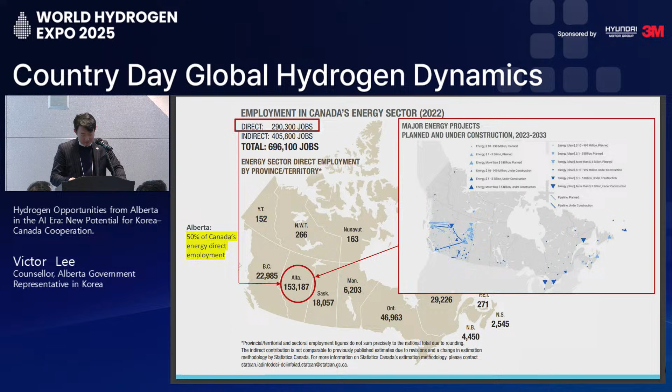And Nicholas also shared this slide, I added a little bit. I think you mentioned 130 projects. Out of 130 projects, 80 projects are under construction or announced and actually putting more money into it, so more active. And if you see Western Canada, a lot of projects are in Alberta. Korea's E1 and SK Eco Engineering and KOSPO are very active in Alberta. SK also has projects in Eastern Canada, but that's for exporting to Europe. The majority of the projects in Western Canada are blue hydrogen in Alberta, some green hydrogen in BC. But as you can see, Alberta has major projects in hydrogen.

And Alberta expects to increase our hydrogen production to over, I think, 4 to 5 million tons based on the current situation, but mainly coming from blue and gray because we have really amazing natural gas resources. And those are very competitively priced. And CCS technologies are improving, so we are able to capture almost 98, 99% of CO2, and technology is getting better and better.

So CCUS. Alberta has one of the world's most advanced CCUS ecosystems. Shell's Quest project has been capturing a million tons of CO2 per year for the past 10 years. They are just celebrating the 10th anniversary this year. So that means 10 million tons of CO2 have been successfully stored. I guess Shell's is one of the largest global projects. And this experience and ecosystem gives Alberta a strong competitiveness in developing low carbon hydrogen and ammonia at commercial scale.

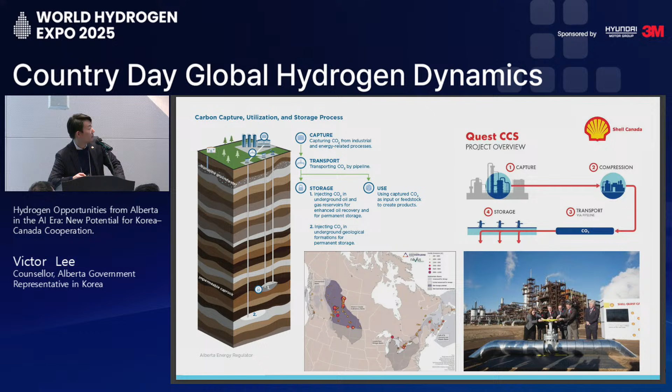So as you can see, most of the CCS availability is in Alberta and a little bit in Saskatchewan. And compared to other provinces or other US states, this is our key strength. And that's why Canada's largest hydrogen convention and Canada's largest CCUS convention are being hosted in Alberta, in Edmonton. Our next Canadian Hydrogen Convention will be April 2026, and I'll be personally attending together with federal colleagues. If you have any interest in deepening your insights into the Canadian hydrogen sector, please consider this conference. This is the best place to connect with Canada's hydrogen stakeholders.

Of course, there are some challenges too. We can talk about R&D opportunities, investment opportunities, but what about trade? Alberta wants to export our blue hydrogen to Korea because we have a competitive advantage in shipping. This is from AltaGas, so the data is a little bit different for natural gas as well as for oil, but it's very similar. Compared to the US Gulf Coast or Middle East, we didn't include Australia because it's very similar to Alberta or Canada, so it's our direct competition. But about the same, 10 to 11 days. So we have a logistical advantage.

However, our disadvantage is domestic logistics. All our Canadian commercial hydrogen is produced in Edmonton. And then from Edmonton to Prince Rupert, there's about 1,500 kilometers of rail. So you have to put hydrogen into ammonia rail tankers, ship it to Prince Rupert, and export it. Currently, there is a federal government unlimited liability clause. So there's a task force between federal government, provincial government, and industry to navigate this logistics and insurance cost. And once it can be resolved, we'll be the global superpower of exporting hydrogen to Asia.

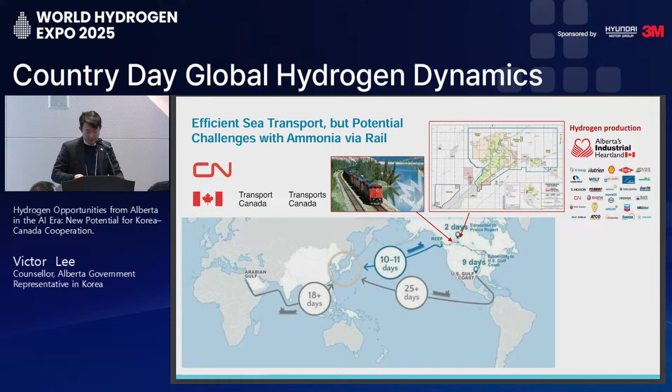In summary, I think there are some 5 key areas of collaboration. You can produce hydrogen in Alberta and export. It's a little bit of a mid to long-term opportunity, but it's still there. The second is hydrogen for data centers, so hydrogen for AI usage in Alberta. Third and fourth is more focused on R&D collaboration.

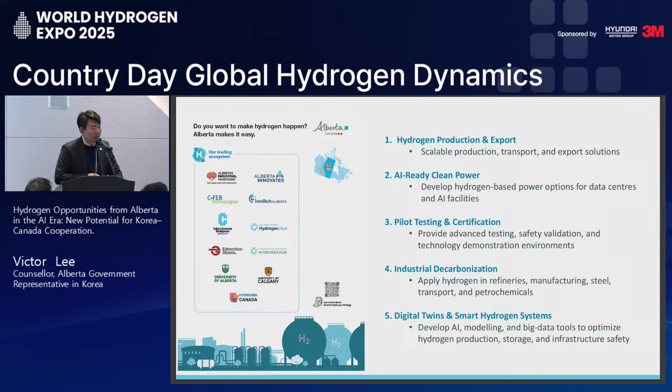If Korean companies or government agencies or R&D institutions want to conduct focused R&D, then we have matching institutions and academia. Last is AI for hydrogen. We can talk about hydrogen for the AI industry, but we can also talk about developing AI to advance the hydrogen economy. So those are also some opportunities. And this is forward-looking potential opportunities only, and publicly available info.

Based on the timeline of energy transition and the economic impact, that's what we see from our office. There are existing opportunities between Canada, Korea, and Alberta. We've been traditionally exporting metallurgical coal, thermal coal, oil, natural gas, pipeline safety, critical minerals. But going forward, some low-hanging fruits or immediate opportunities include joint feasibility studies between Alberta and Korean stakeholders to further advance various opportunities. There's R&D partnerships, energy safety, circular economy, or hydrogen-related standards and codes.

Going forward, joint CCS projects or pilot projects for Korean companies to test, pilot, commercialize and develop projects together and go overseas. And even further, you can produce hydrogen from Alberta, use it for industry for blue steel or data centers, or even looking forward, SMRs, small modular reactors as well.

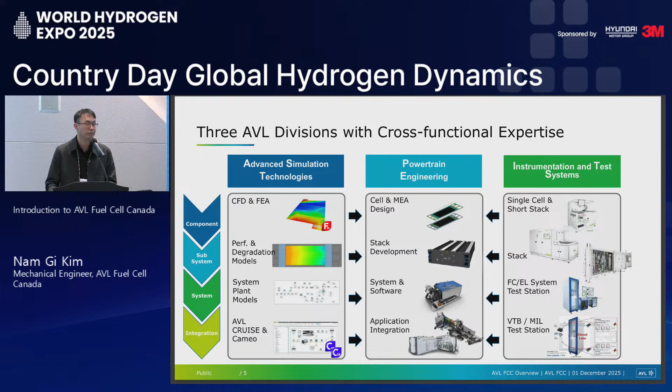So focusing back on AVL Fuel Cell Canada, we are a relatively new affiliate, but we have a number of employees who've had extensive years of experience working with PEM fuel cells, as Vancouver is home to a number of world-class companies. Leveraging this experience, we're able to design, engineer, prototype, and test custom fuel cell and electrolyzer stacks.

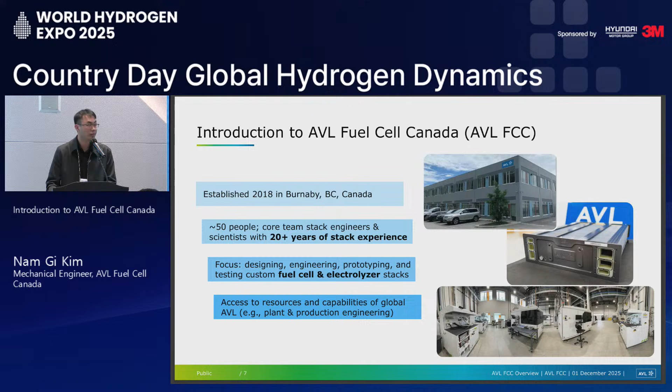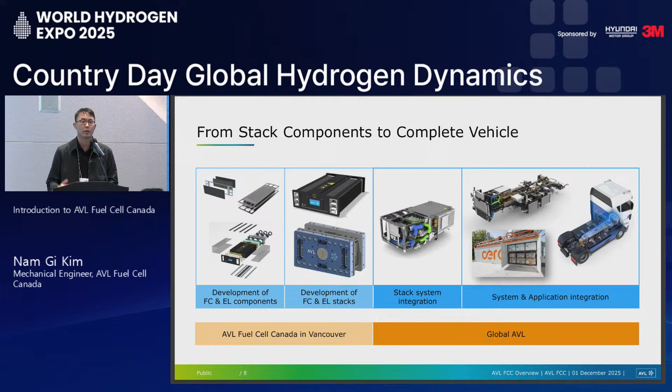Just to give you a little bit of background, AVL Fuel Cell Canada primarily focuses on the component and stack level. However, we do work with AVL Global to help meet customers' needs in stack system integration and system and application integration as well. And in the past, we have successfully completed projects working in this collaborative manner.

Of the specific areas where AVL Fuel Cell Canada has a lot of knowledge, there are 3 that I would like to highlight. First is design of bipolar plates. We have employees with experience working with carbon and metal bipolar plates. Another area of expertise is design of the membrane electrode assembly, and this includes electrodes, membrane, CCM, GDL, and for electrolyzers, PTL as well. Finally, we have experience in design of stack hardware, which includes end plates and compression systems.

And combining all these 3 areas of expertise, we're able to provide a comprehensive design of fuel cell or electrolyzer stacks. And we're also able to provide a range of stack-related services to help in our design.

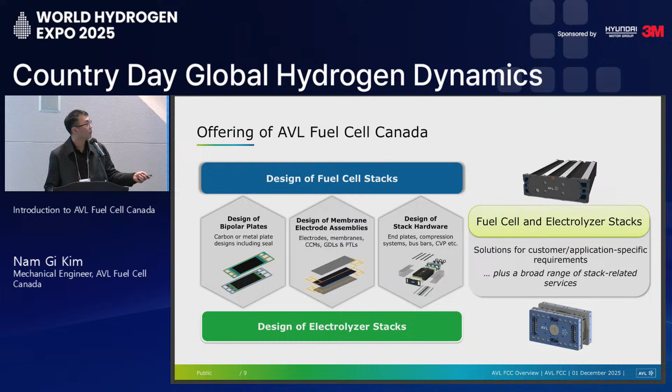In our state-of-the-art R&D infrastructure in Burnaby, we have 2 areas I'd like to highlight. First is our prototyping lab. While we do not have the capability to mass produce stacks, we have the capability to produce small quantities where we can show our prototypes, and we can use these stacks for design verification tests such as performance and long-term

durability. We also have a hydrogen-safe lab where we have a number of testing platforms. We have 4 subscale stations which are focusing on component benchmarking and screening, and we have 4 short stack and 1 full stack test bed to focus on design verification tests.

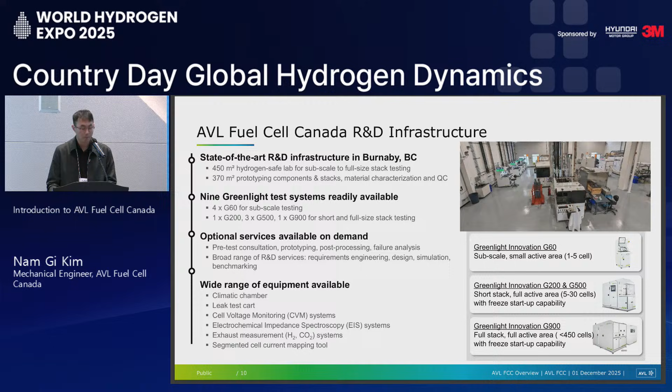To give you a little bit of some of the projects that we've had, leveraging the innovations that we have with the bipolar plates, MEAs, and stack hardware, we have come up with a number of stack designs, which we then use as a base for customer projects. One thing I would like to highlight here is that we have experience working in a wide range of industries. In the past, we have worked with a commercial vehicle OEM, marine OEM, air-cooled stack for drones, as well as multi-megawatt PEM electrolyzer stack as well.

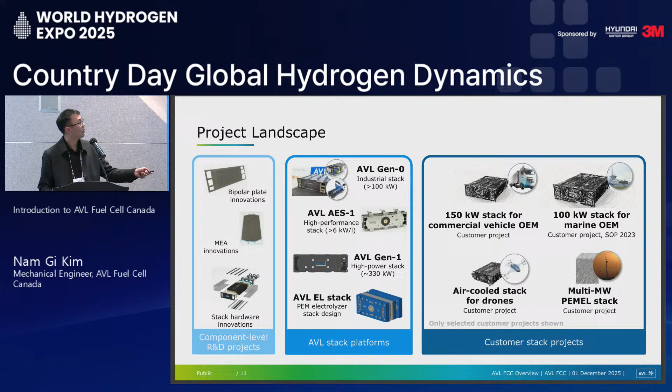To go into a little bit more detail, this is a picture of our Gen 1 PEM fuel cell stack. It has a rated power of 200 kilowatts with a peak power rating of 330 kilowatts. Using carbon plates, it has high efficiency, and with our in-house testing, we've been able to showcase that it has freeze startup capabilities from minus 30 degrees, and it has extensive lifetime durability as well.

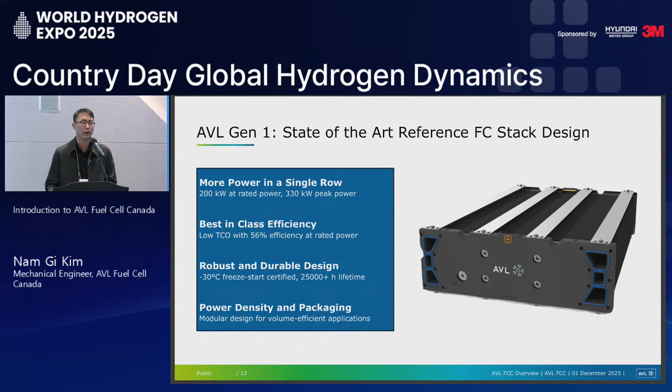Now I would like to discuss with you some of the innovations that we're looking into at AVL Fuel Cell Canada. One area I would like to highlight for PEM stack is intermediate temperature and high temperature. What we've found is that there are certain sectors such as aerospace and heavy industry where they're looking to operate PEM stacks at a higher temperature.

Currently we're looking into innovations using different technologies to push the PEM stack, which traditionally operates up to 90 degrees Celsius at stack outlet temperature. We're trying to push this to at least 120 degrees, which we call intermediate, and even all the way up above 200 degrees for high temperature application. In conjunction with coming up with innovations in terms of material selection, we're also upgrading our lab capability to support our design choices.

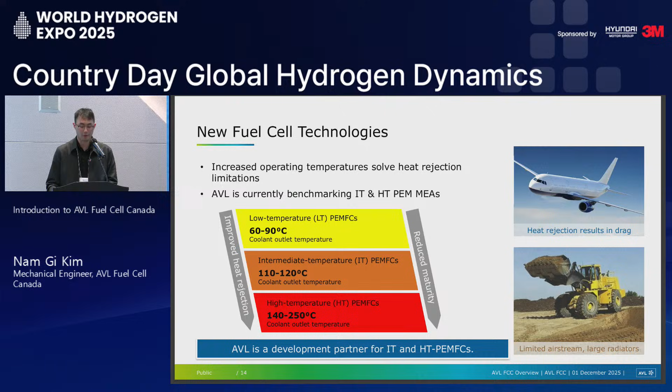Another area of innovation that we're looking into right now with PEM stack is lightweighting our stack designs. Here we are working with Red Bull and taking our Gen 1 stack, which I've shown you before, and identifying ways to reduce weight and thus increase the power density. We're doing this in 2 steps.

We have already completed the first step, which focuses on the outer stack compression, stack hardware side, which has given us about 30 kilogram reduction in weight. And right now we're further looking into additional areas where we can further decrease weight and increase our power density.

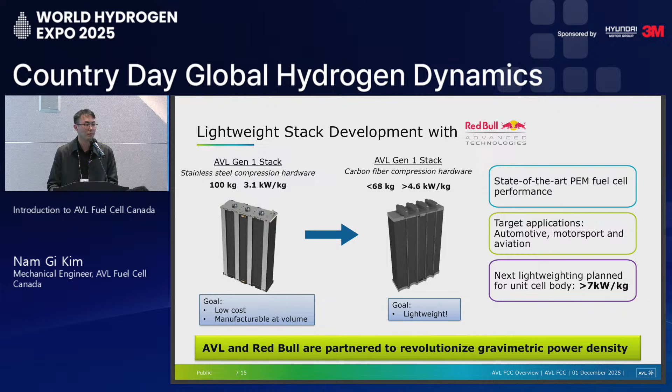The next area I would like to showcase to you is PEM electrolyzer. With the wealth of knowledge that we have in the company, we found out that there is great synergy between PEM fuel cell stacks and PEM electrolyzer. Last year, we decided to take on this project. Within the course of the year, we were able to design, develop, build a prototype and test an electrolyzer stack, which meets the US Department of Energy targets.

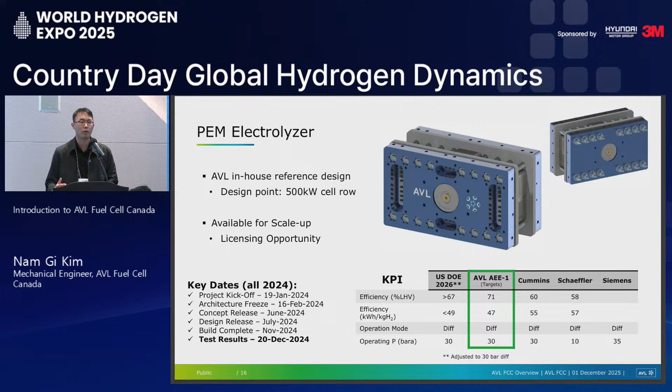A model of the stack is available for you to view downstairs at the Canadian Pavilion if you want to see. This is a project that we feel very accomplished in the company for making this stack. Right now, we're looking into further improvements. We know that the market is looking for multi-megawatt solutions for PEM electrolyzer, and so we're looking into different areas on how to improve upon our initial design.

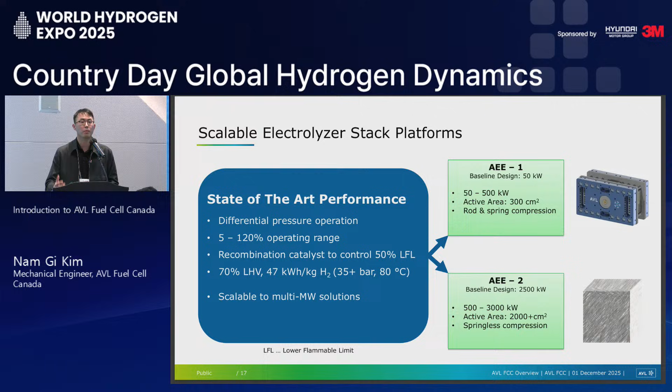The last area I would like to discuss with you is the AEM electrolyzer. This is a technology that is not as mature as PEM stacks and PEM electrolyzers, but AVL feels like this is an area where we could potentially see a lot of growth in hydrogen generation. There are 3 areas with AEM which we focus on.

First, there's the supply chain definition. Here we're looking for companies that we would work together with to provide us with next generation MEAs and CCMs. In the past, for PEM stacks and electrolyzers, we have had a very good relationship with our suppliers, where we would get the product, provide valuable feedback and help develop the products. This kind of relationship is something we're looking for in the AEM electrolyzer world as well.

The second area of AEM is stack development. Here we're looking for any companies that need stack design in their application, where we'll be able to provide our expertise and help come up with a stack design. The last area of AEM is testing services. Here we're looking for anybody who has AEM technologies that they want help to test and validate. We'll be able to perform testing at both component level and stack level to show performance and/or durability.

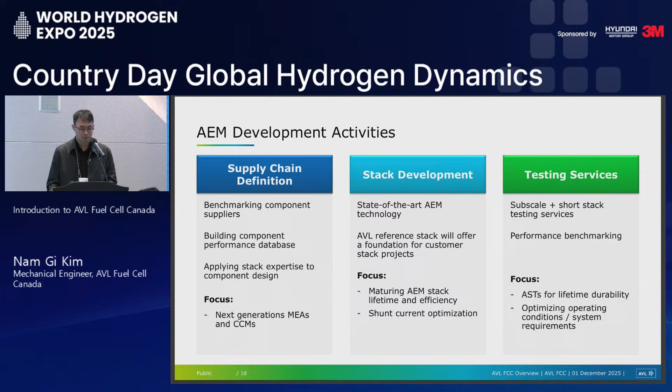Jumping back to stack development, we do have an R&D stack in development for AEM. We started earlier this year, and we're currently in the prototyping phase, and hopefully we'll be able to get some test results early in Q1 of next year. We're hoping this will be a stack design that we'll be able to base off of for any customer who is looking for a stack design of their own.

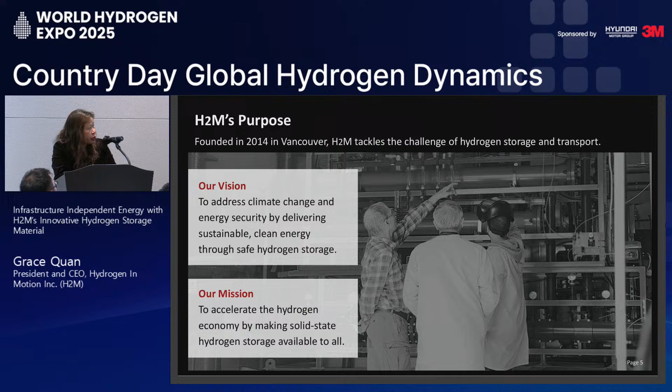My apologies. Okay, so a little bit about Hydrogen in Motion. I'm the co-founder and CEO with my colleague Mark Cannon, who's the CTO and is here at the show. We founded Hydrogen in Motion to address one of the major problems in the hydrogen economy, which is hydrogen storage. Our vision was to address climate change by bringing clean energy to fruition through the vehicle of solid-state hydrogen storage.

So what's holding hydrogen back? I call hydrogen storage and transport the silent killers of hydrogen projects for 3 reasons. One is it's very capital intensive. Many project developers don't budget enough for hydrogen storage. It's about the same price as your electrolyzer or your fuel cell, so people are usually an order of magnitude short for the storage. The high pressure is complex and expensive. And then there's no hydrogen infrastructure. So storage and transport are a challenge.

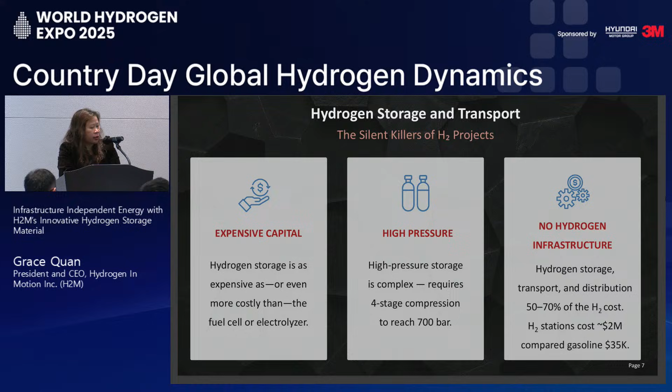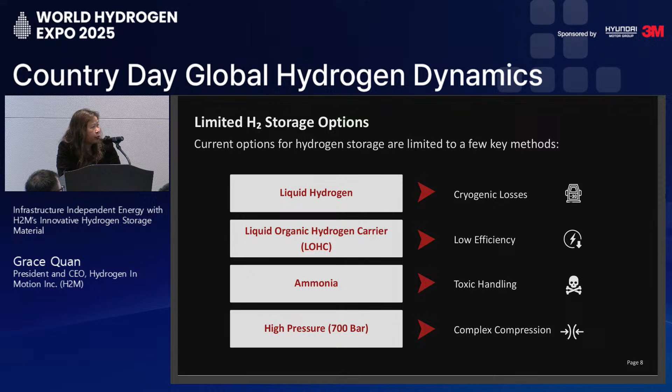There are a number of different hydrogen storage options. Liquid hydrogen has the challenge of cryogenic losses, boil-off. Liquid organic carriers have low efficiency; it takes about as much power to get the hydrogen in and out as the power that you're carrying. Ammonia has very well-known toxicity issues, and high pressure has the complexity of high pressure.

So what's our solution? Finally, we get to this. Hydrogen in Motion has developed a solid-state hydrogen material. It's carbon-based, designed at the quantum level, doped and decorated with nanomaterials specifically to attract hydrogen. We add a small amount of pressure, 50 to 80 bar, and we're able to get equivalent storage to 700 bar, but in a smaller tank.

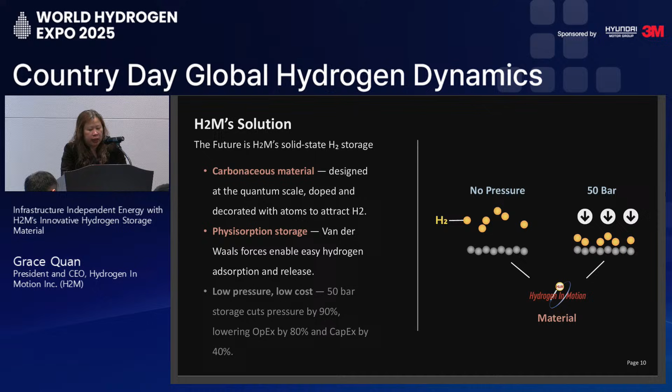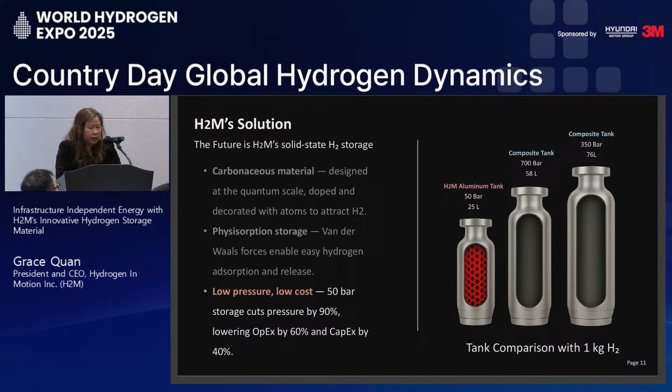Our value proposition is in 4 dimensions: safety, affordability, gravimetric and volumetric density. We have considerable advantages against batteries and other storage technologies.

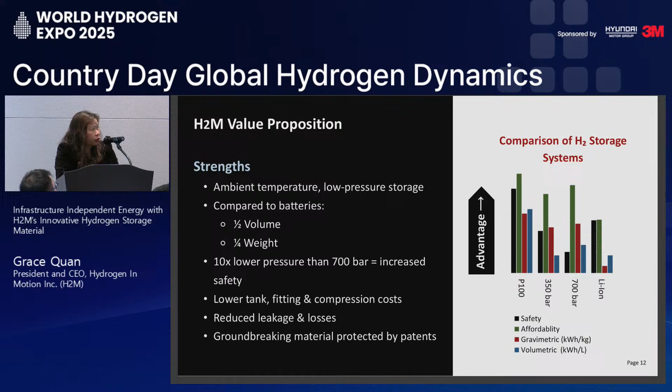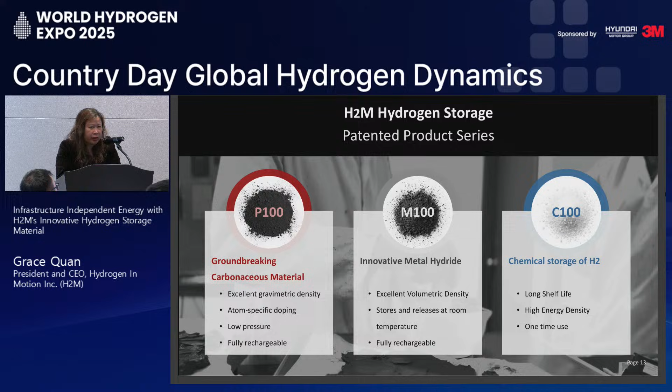So Hydrogen in Motion, we've been thinking about hydrogen storage, and we think hydrogen is not like buying a computer. You can just plug it in a wall. Your building is already wired up. When you have a hydrogen product, you actually have no infrastructure. So the challenge is bringing everything to the table. So we've put together a concept called infrastructure independent energy.

Or you can also burn hydrogen. So in Canada, we have cottages, and people are off the grid, so they power their appliances using propane or natural gas. So you can also apply that with hydrogen.

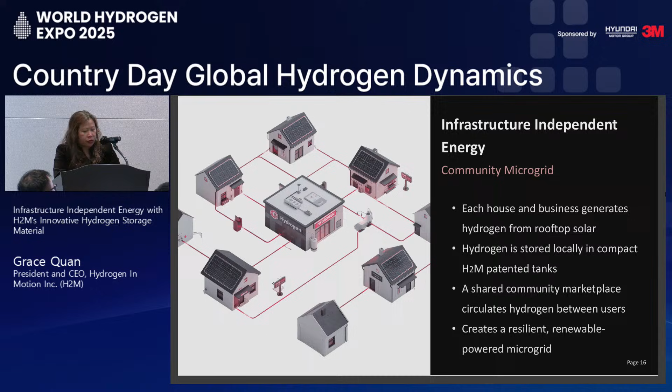We can also do this in very large scales. This is a future project, but we plan to be able to put hydrogen in shipping containers. We believe we can store 1.3 tons of hydrogen in a 40-foot shipping container. That's 2.5 times any hydrogen storage that's available on the market now. And that way you'll have dispatchable power from renewable fields.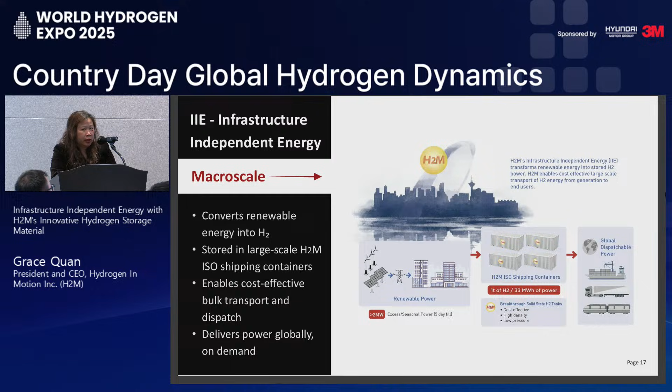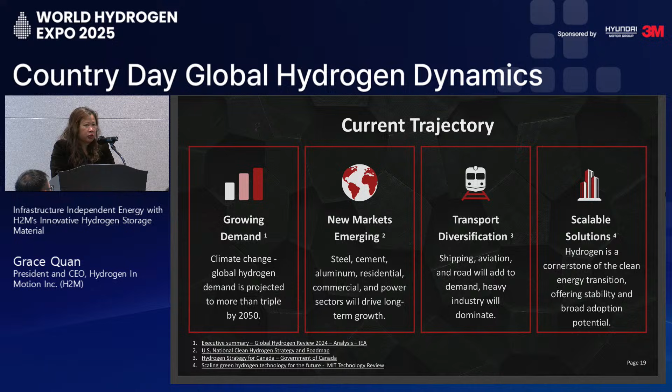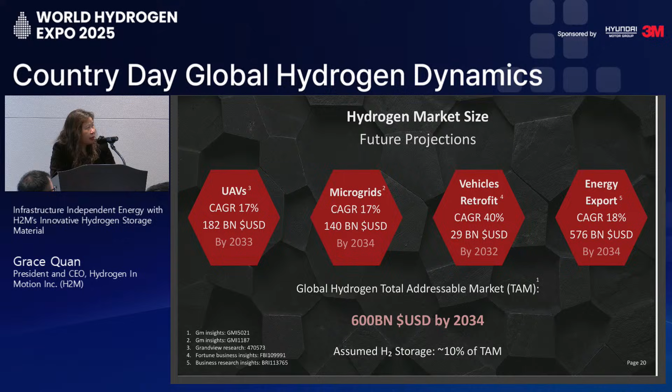Why invest in hydrogen? I think most people in the room already know these stats, but there's new markets. Climate change is not going away soon. We can talk about transport diversification and scalable solutions, which is what Hydrogen in Motion is bringing to the table. We've looked at different markets, and we're moving from the very high-cost, price-insensitive market of UAVs that require small tanks to microgrids, which was the peer-to-peer network that we talked about. Vehicle retrofits, so you can burn hydrogen in vehicle retrofits, and that gives you an 80% GHG reduction, which is a great way to transition society. And then energy exports, which is the large-scale transportation of hydrogen.

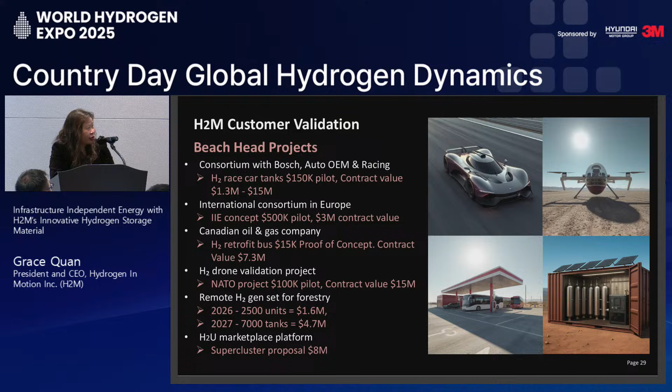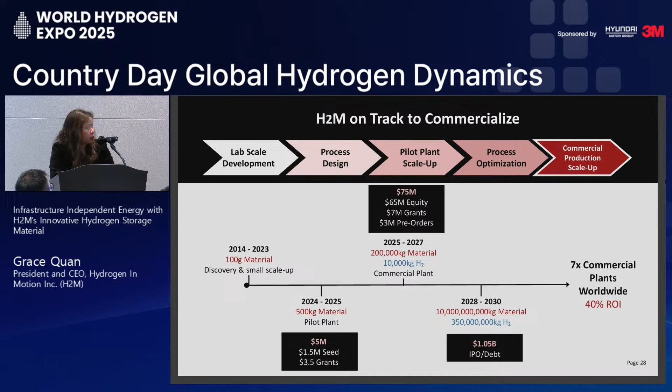For Hydrogen in Motion, we have a bunch of customer validation projects, from drones to racing cars to putting hydrogen on an island. But these are all things that are in the pipe. Right now, we've made our pilot plant and are raising an equity round. And then, these are use of funds.

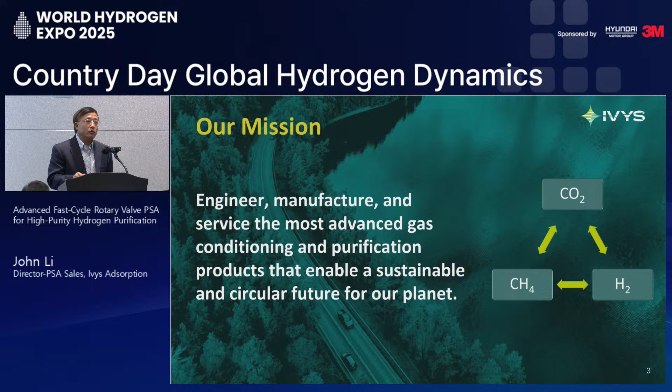And so what we do at Ivys Adsorption, we design, manufacture, and service perhaps the most advanced gas conditioning and purification systems. Those products are being used by our customers to generate clean and renewable gases and energies to enable a circular and sustainable future for our planet. So that's what we do.

The gas purification systems we design are mostly based on the two core technologies we have. The first one is pressure swing adsorption, or PSA. The second is temperature swing adsorption, or TSA. Our PSA-based systems have multiple vessels, typically 6 or 9 adsorption vessels. All of those systems use rotary valve technology to control the gas flow in or out of these adsorption vessels. So this is very different from the conventional PSA you see on the market.

In conventional PSA, a large number of on-off control valves are used to control the gas flow, but we do not use that. We use rotary valves to control the gas flow into different vessels. Our PSA-based systems can process a feed gas composition that is rather complex with multiple impurities, where PSA can remove those impurities and achieve very high product gas purity. The PSA systems are designed mainly for hydrogen purification, biogas upgrading, and other industrial gas purification applications.

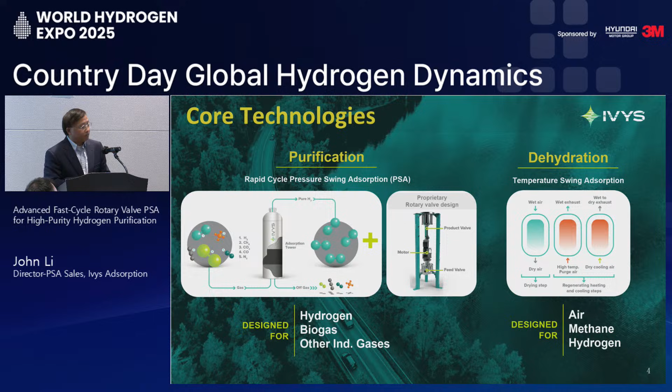Our TSA-based systems are much simpler. Basically, you usually have 2 vessels, and they are mainly used for gas dehydration applications. So currently, we offer 3 product lines for gas purification. The first one is our industrial PSA. Those systems are all using rotary valve technology. The PSA systems are used for high purity hydrogen production and also for high purity helium production. And lately, we expanded the application of our PSA system to CO2 capture.

The second product line we offer right now is biogas upgrading systems. Those are also PSA-based systems. They can be used to generate pipeline-grade renewable natural gas from a wide range of biogas sources, including digester gases, landfill gases, and wastewater treatment plants. Our third product is the dryer, which is used to remove water from hydrogen gas generated by the electrolysis process, or to remove water from air or compressed natural gas process gases. So those are the 3 product lines we currently offer.

To support the installation and operation of our equipment at the customer site, we have a dedicated customer service team. This team provides aftermarket customer care services, such as supplying replacement parts to our customers and providing technical support for our equipment.

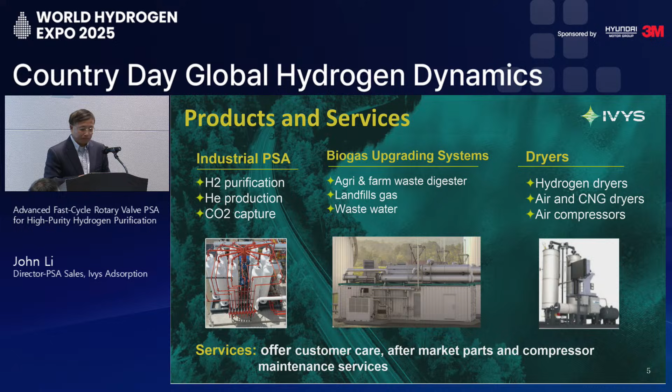When used for hydrogen purification, our PSA systems offer a number of unique features. First, they can achieve very high hydrogen purity, up to 6 nines if needed. Achieving 5 nines or 6 nines is actually quite common for PSA applications. The second is that they are very compact because of the use of rotary valve technology. Compared to conventional PSA, even at the same capacity, our PSA is typically at least 3 to 5 times smaller.

Our PSA is also extremely reliable because by using rotary valves, we eliminate the large number of on-off control valves which you see in conventional PSA. Those on-off valves are moving parts, and they open and close every few minutes, so they are the high failure point for PSA operations. By eliminating those on-off valves, the reliability of our products became much better.

Right now, our PSA systems are all fully pre-assembled and skidded. The vessels, the valves, and the piping are all installed in our shop. The adsorbent is also pre-loaded into the vessels. So we ship the whole skid to the customer site, and the installation and commissioning can usually be finished in 1 or 2 weeks. This is very short for a scale like this. It saves a lot of time and money for our customers.

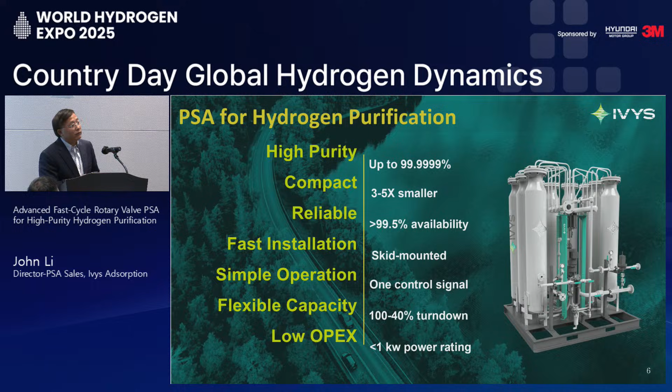Currently, we have over 350 PSA units deployed worldwide for hydrogen purification. The applications include renewable hydrogen generation using biomass, municipal solid waste or industrial waste like tires through gasification or pyrolysis. The PSA is also being used for hydrogen hubs, where hydrogen is produced at a central location and then trucked to different use locations.

Because our PSA is very compact, they are being used for on-site hydrogen generation, for example, in hydrogen refilling stations. And in recent years, a couple of speakers mentioned ammonia, which has been viewed as a hydrogen carrier. At the point of use, ammonia can be cracked to generate a hydrogen and nitrogen mixed stream, and then our PSA can be used to extract the hydrogen from that gas stream. Those are the typical applications of our PSA.

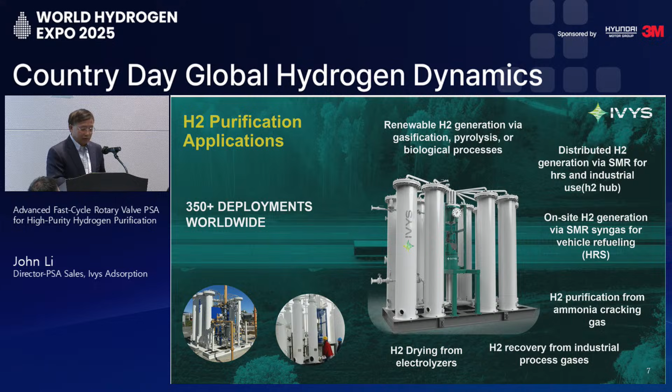This slide lists the typical feed gas our PSA can process to generate high purity hydrogen: typical methane steam reforming, ATR reforming, and those are the very common applications for PSA. In recent years, we see more interest in gasification as well as ammonia cracking.

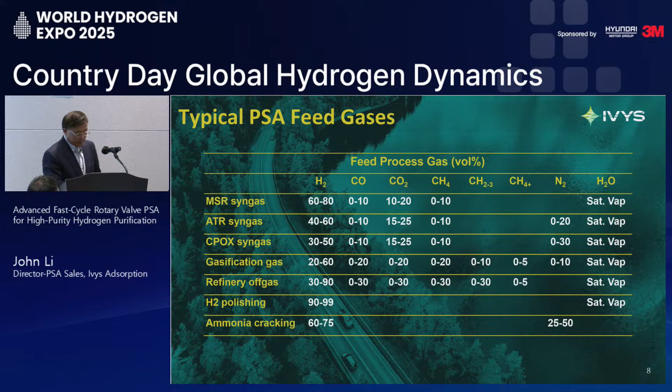One point I would like to point out is that our PSA can handle saturated water vapor in the feed. As long as the water is in vapor phase, it does not need to be removed. Our PSA can handle it and remove it from the hydrogen stream. The next few slides show some actual application cases of our PSA.

This one is located in Long Beach Port near Los Angeles in California, US. The plant actually generates three products: electrical power, heat, and hydrogen. Our PSA is used to recover hydrogen from a solid oxide fuel cell waste stream. As you can see, the hydrogen content in the feed gas is only 26%, very low. We supply a 2-stage PSA, and we can get the hydrogen purity to over five nines.

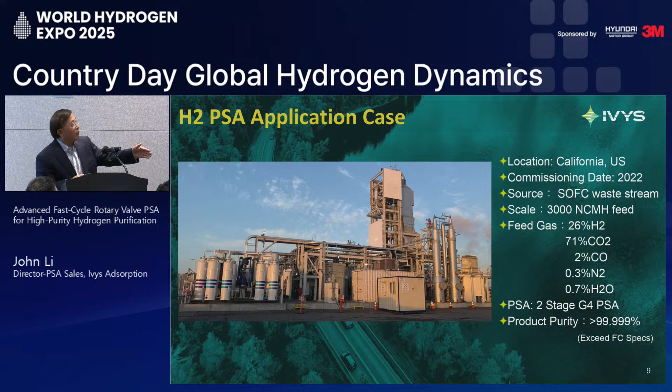This is an on-site hydrogen generation case. It's located in Korea, and as you can see, our PSA is packaged into a container, and then this container is shipped to the hydrogen generation site.

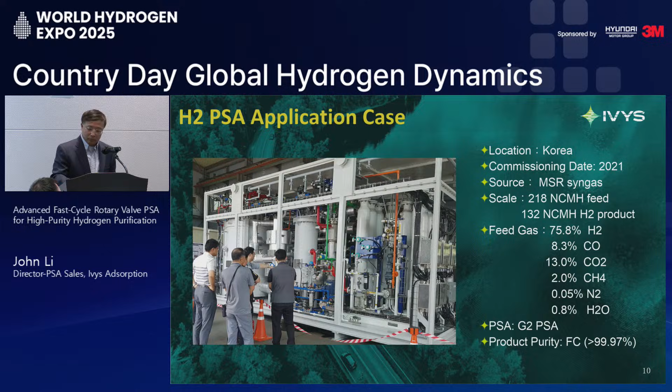Many of our PSA units are being used in petrochemical industries. As you know, the reliability requirement for the petrochemical industry is very high; the equipment cannot be allowed to shut down frequently. We have many units running at petrochemical plants. This one is located in Poland, and it was commissioned in 2002. It's still running today, already about 23 years. The feed gas to the PSA is standard methane steam reforming syngas, and our PSA gets it to three nines purity.

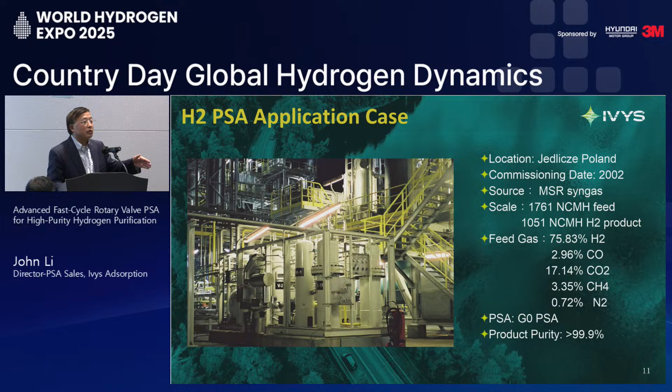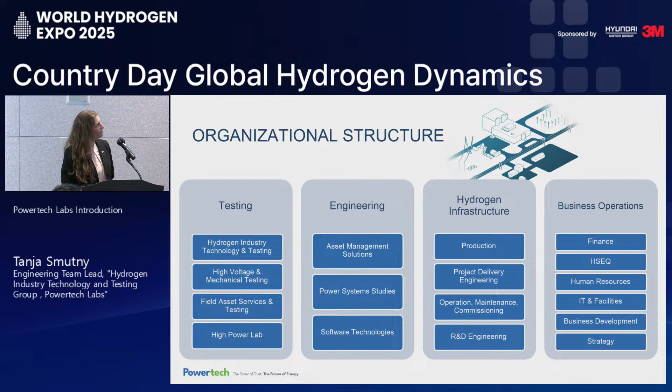PowerTech has a very long history in hydrogen. We got our start in the 90s in hydrogen, and our history includes designing and building some of the first non-commercial hydrogen fueling stations. And more recently, we have achieved 350 gram per second high flow testing, as well as the first non-commercial hydrogen truck fill in 10 minutes.

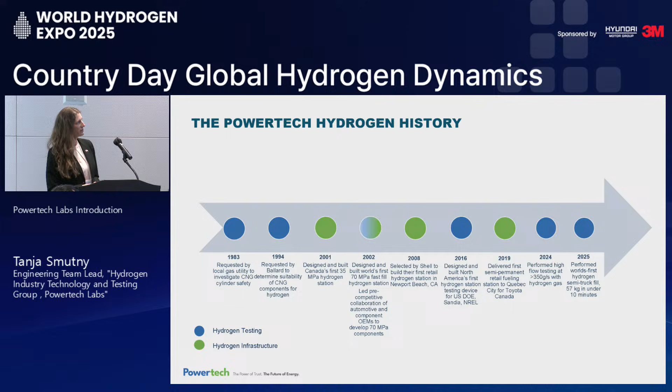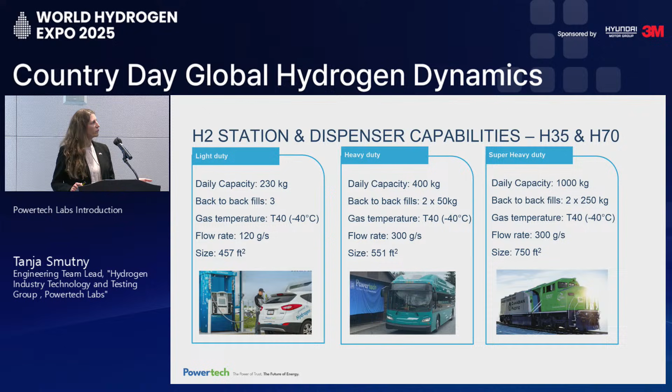Our infrastructure group designs and builds dispensers, as well as stations and testing devices. Some of their capabilities: obviously light duty, getting into heavy duty, and then as well super heavy duty. Our Powertech USA team builds mobile refuelers, and we have a capacity of 1,000 kilograms of hydrogen storage.

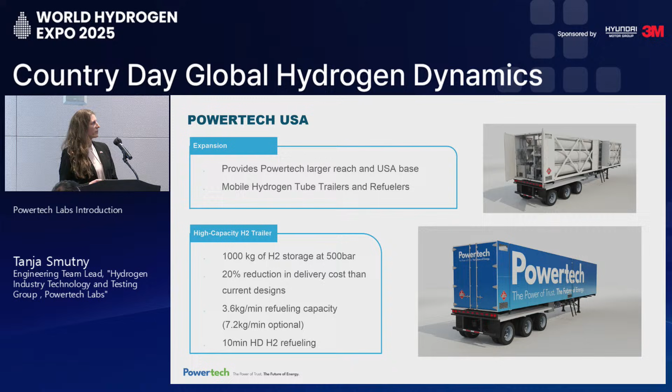Onto our testing team, which is what we are here to represent for the most part. So we are able to certify and test hydrogen cylinders. This is mainly type 4 cylinders for the vehicle industry, but it doesn't exclude any of the other types of cylinders that are out there.

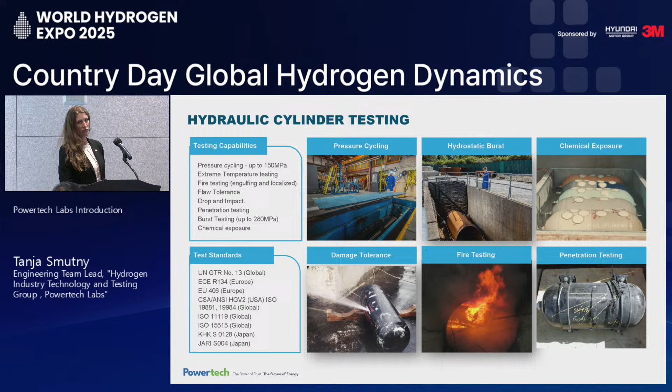So we are able to perform hydraulic testing at high temperatures, low temperatures, and ambient temperatures, as well as burst testing, chemical exposure testing, any sort of damage tolerance testing, fire testing, and penetration testing. Also in this lab, we have a pneumatic testing facility where we are able to hydrogen gas cycle cylinders and entire fuel systems, as well as heavy-duty cylinders and fuel systems.

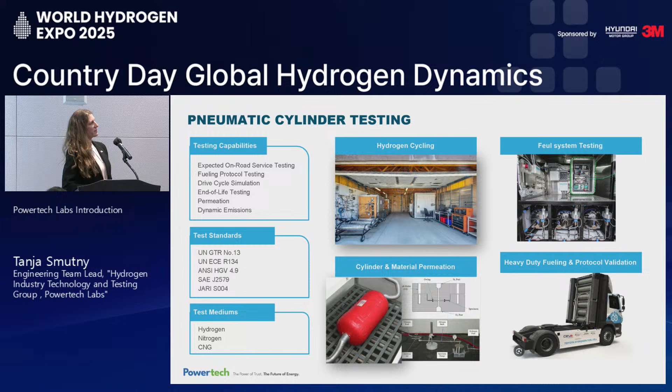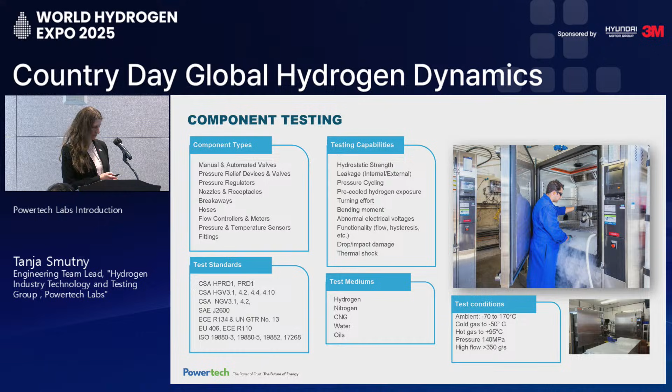In our component testing facility, we have a very long list of testing that we are able to perform, and this is for any component that is in the hydrogen fueling station or in the vehicle at high pressure. So this includes things like the nozzle, receptacle, hoses, valves, OTVs, etc. This is an example of the highest flow we have achieved through a nozzle receptacle, peak flow of 378 grams per second. This was only 2 years ago.

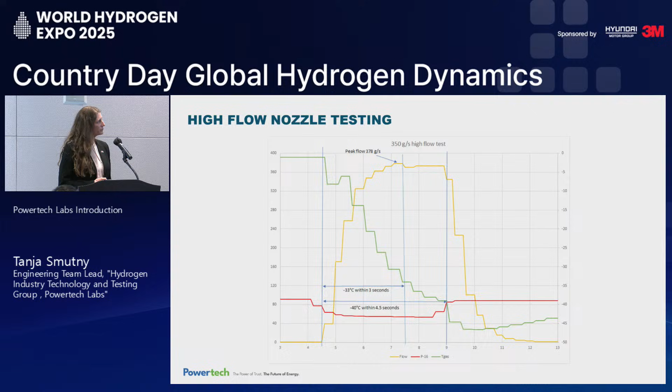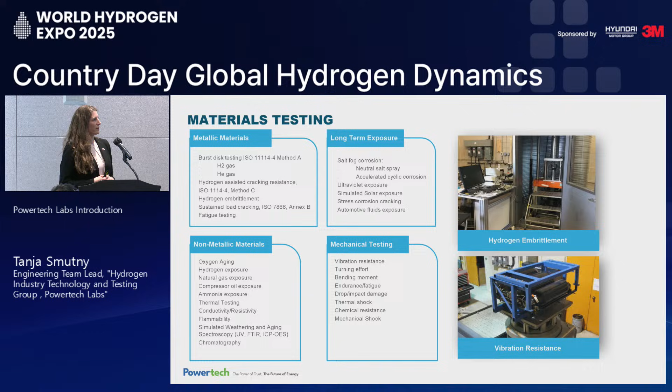And we have the advantage at PowerTech of having the support of a number of other laboratories, such as the chemistry lab, a materials lab, a mechanical lab, and things of that nature. And they are able to assist us with testing of any of the materials inside a tank, such as the liner, which is made of plastic in a Type 4 tank, and of course, the metal of the OTV, and the fibers and the resin.

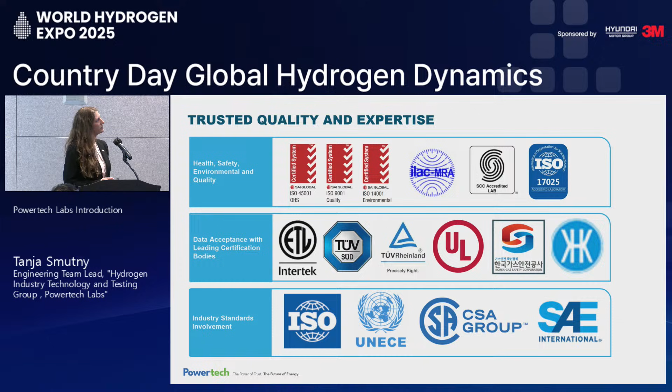We are an ISO 17025 certified lab, and we have extensive experience working with all sorts of certification bodies from around the world. And we are very actively helping on standards committees as technical experts. And that concludes my presentation. Thank you.